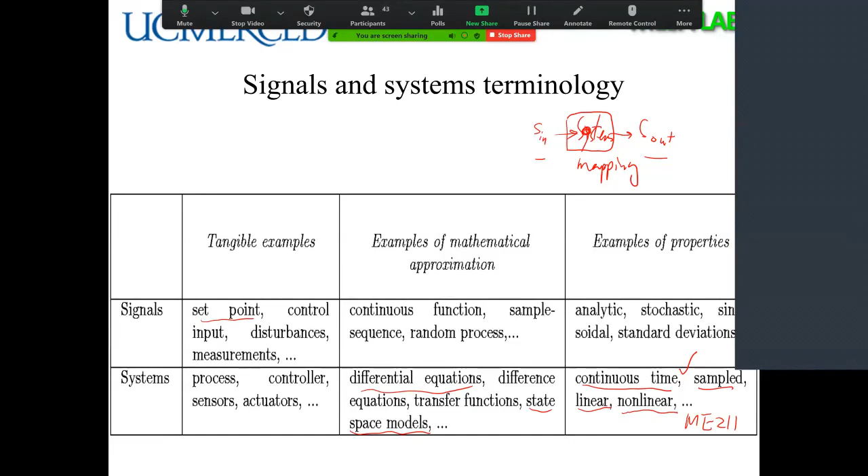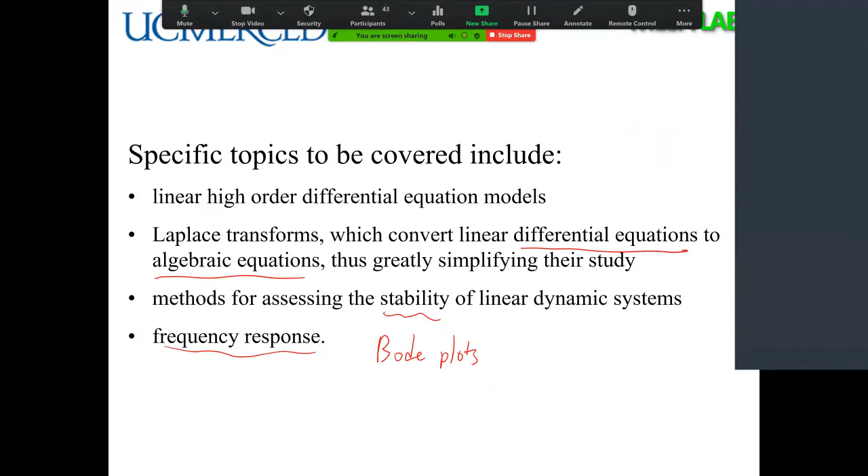For the time domain, we start with what is a signal, what is a system. A signal is a signal, a system is a system. A system is a mapping between two signals. You operate on an input signal, you produce an output signal. So, well, Laplace transform, and we are going to do a quiz today. So we're going to see. So this is our starting point.

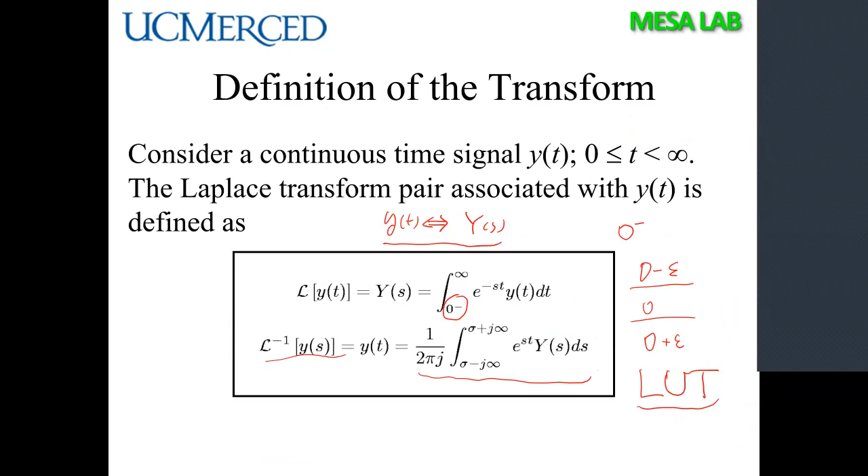We mentioned a very important name called Heaviside. He used the notation p as an operator, so we can turn a differential equation into an algebraic equation. But later on, everything is formalized in the definition of the Laplace transform. I gave an explicit warning about the 0 minus. We should not ignore that. And this is the differentiation law for the Laplace transform, so you should use the 0 minus.

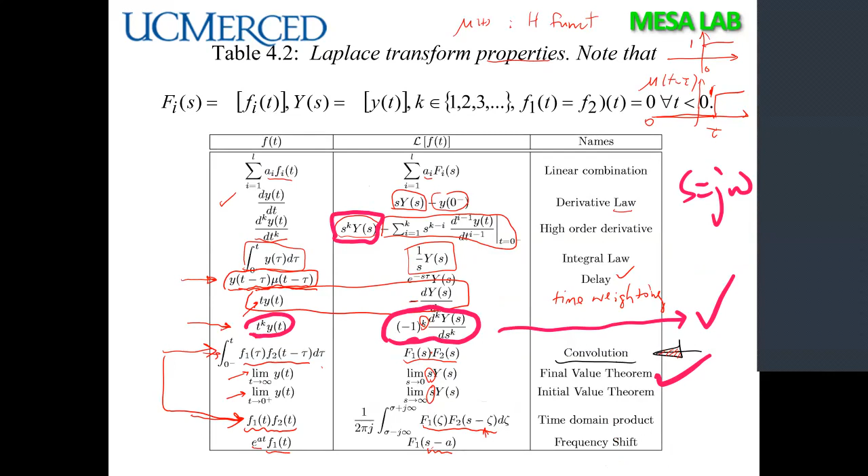Today's quiz is basically to give you training on this entry. If you don't note this entry, you will be wrong. Next lecture, I'm going to run through the quiz with you to see why you get an error, why you mess up this sign, plus versus minus. We're going to review that next week. But today we are going to continue.

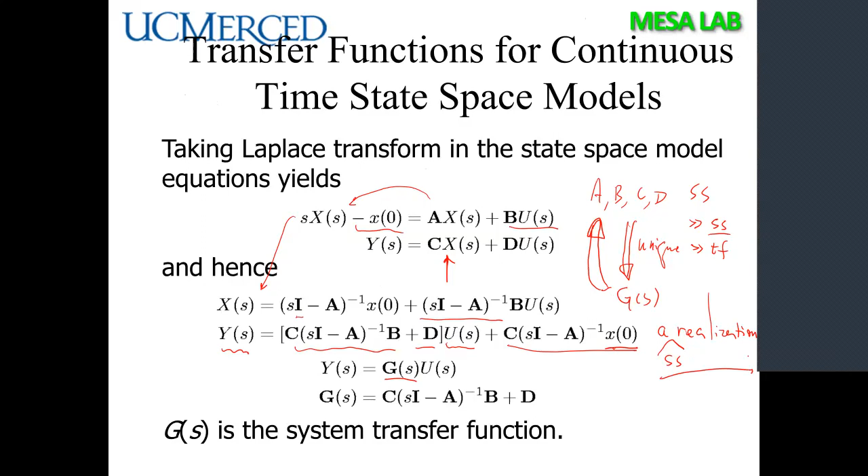We also went through the ABCD part. One thing is clear: given ABCD, the transfer function G(s) is unique. From G(s) to ABCD is not unique. Therefore, given G(s), you have infinitely many possible state space realizations. And we talked about transport delay, how in a digital computer they use a first in, last out array to represent delay.

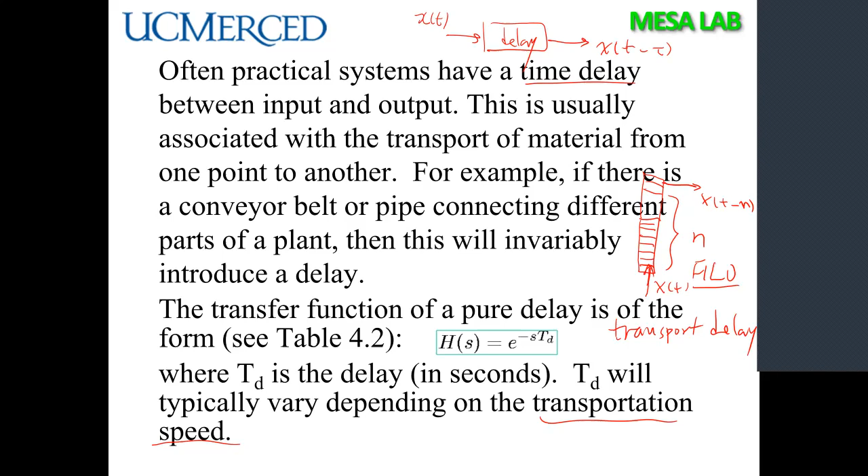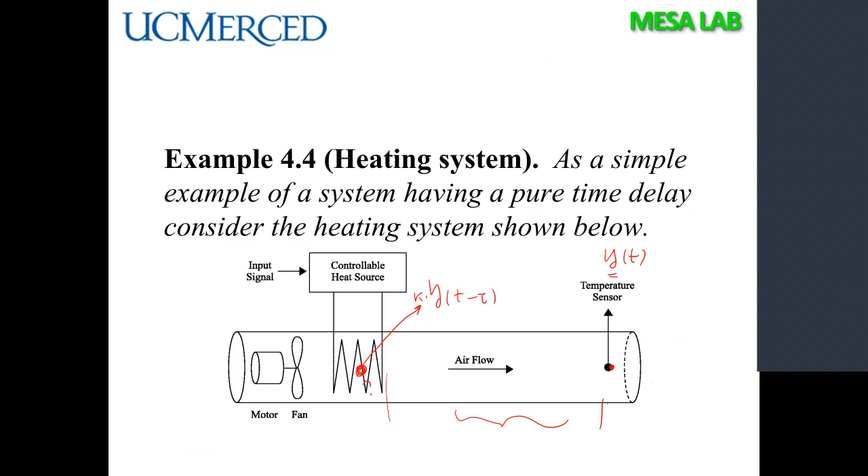Then we talked about the first order plus delay time model to mimic this type of temperature control system. Your temperature sensor and your real process may have a delay. And I mentioned that among all industrial control tasks, 80% are temperature control tasks like this. So first order plus delay is a very fundamental model, and we should pay special attention to it.

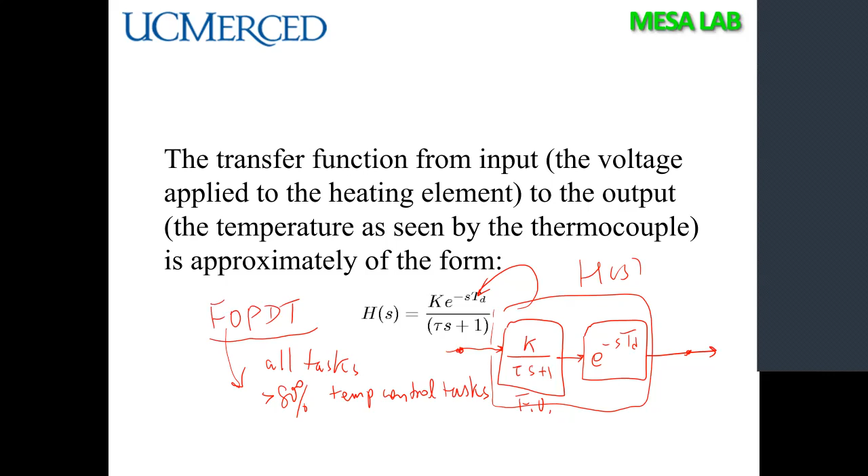So the transfer function is input and output for a linear system in algebraic form. We talked about stability, that the poles must all be in the left half plane. And we also talked about zeros in the right half plane, giving you a non-minimum phase zero.

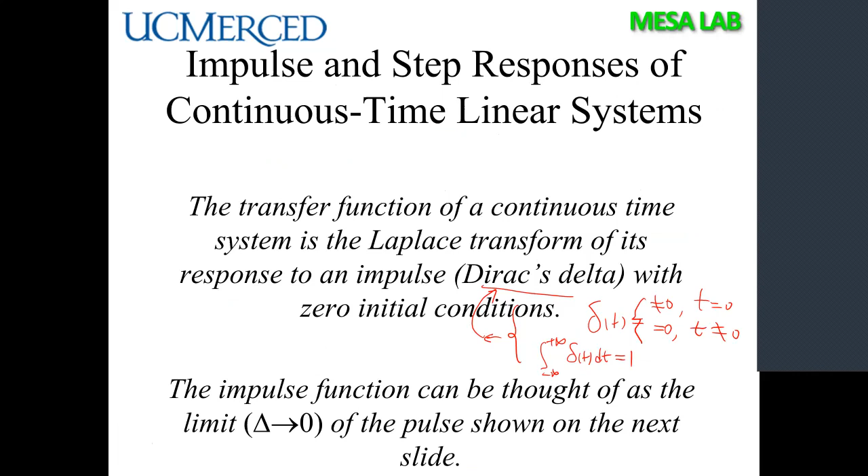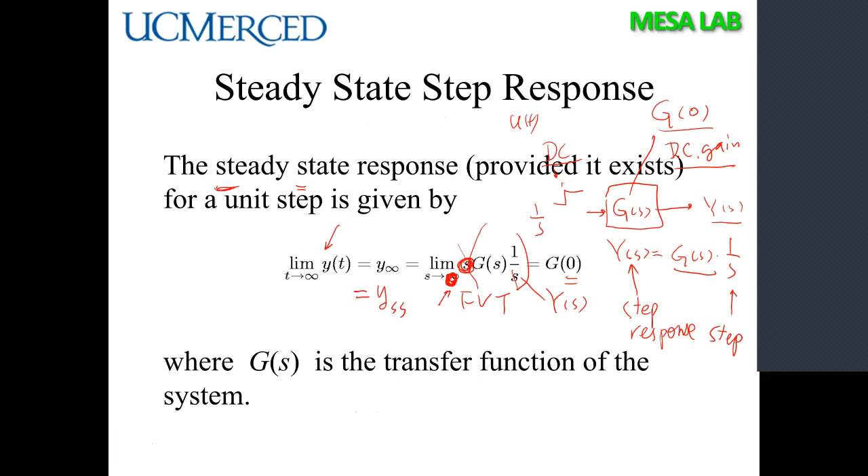Then we talked about the delta function, the unit delta. We talked about step response, steady state, and direct current gain, DC gain. In many cases, we make the DC gain 1, so with a 1 input in steady state, you also get a 1. But for the transient, you have 5 parameters: steady state, rise time, overshoot, undershoot, and settling time.

So like we showed in this figure, that undershoot part is due to the non-minimum phase phenomenon, okay? So I hope you pay attention to that. But in reality, you don't have this one. Say, for example, a first order plus delay system. You will never have this kind of undershoot there at all, okay?

So your input is always like this. So you have T, and you have an L in here. So everything is 0 until L. Then you have something going up. So this is the step response, okay? And this step response is also called the reaction curve.

So clearly, if you have a reaction curve, you should be able to infer what's this. This is a part of our homework problem. So given the measurements, like this figure, can you figure out what is my T, what is my K, what is my L? So that process is called system ID, okay? ID stands for identification, like you have driver's ID, right? You identify the system model parameters. We'll see if we get enough time to cover some of the system ID problem.

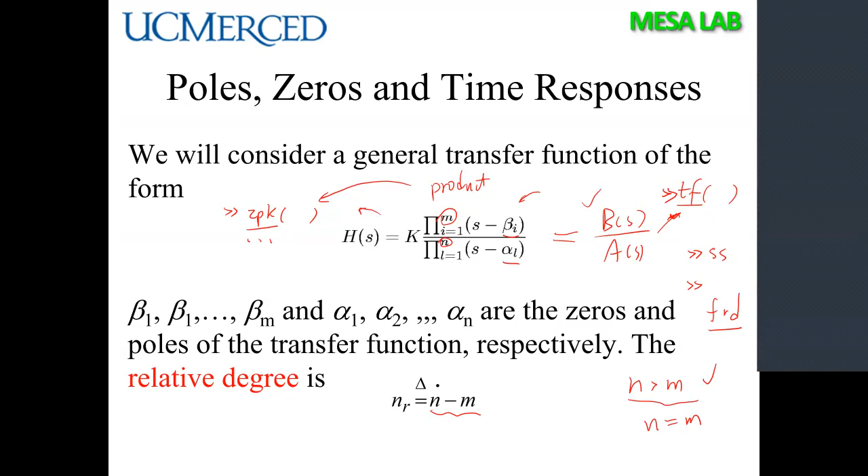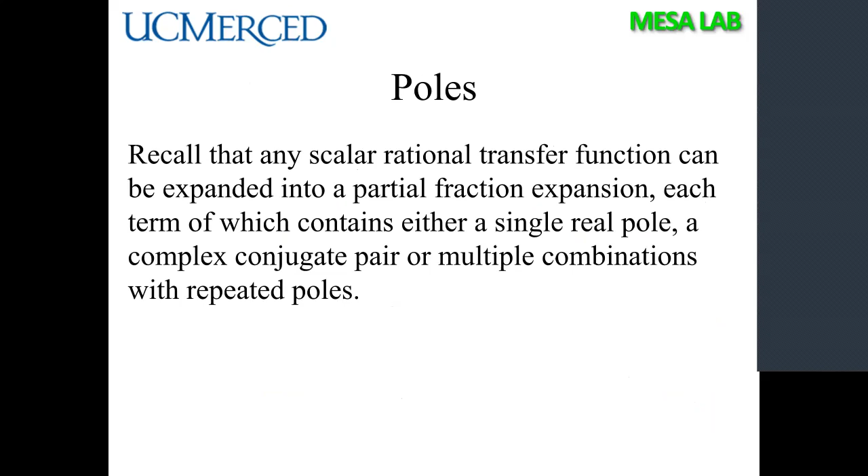So poles, you may have repeated poles, you may have complex conjugate poles, you may have distinct real poles, and so on and so forth. So in this case, we have a single pole. So I want to see what's the step response. So this is a step, this is a system. For the step response, there's a key step here. You should have learned this in high school. It's called partial fraction expansion. It turns out it's like this. So after you get these partial fractions, then you can use a lookup table. You can get this response.

So this response, in principle, I will say this is wrong. You should put the comma, t greater than or equal to 0, okay? Because if t is negative, this is not going to be right, right?

Can we get the extension on the lab? Could be. Let me check with our TAs. You mean lab 3? I think it's due next Friday, right? Not today. Or lab 2? Are you talking about lab 2? You should have enough time, like a week window to finish. So we're going to do a quiz today. So, okay.

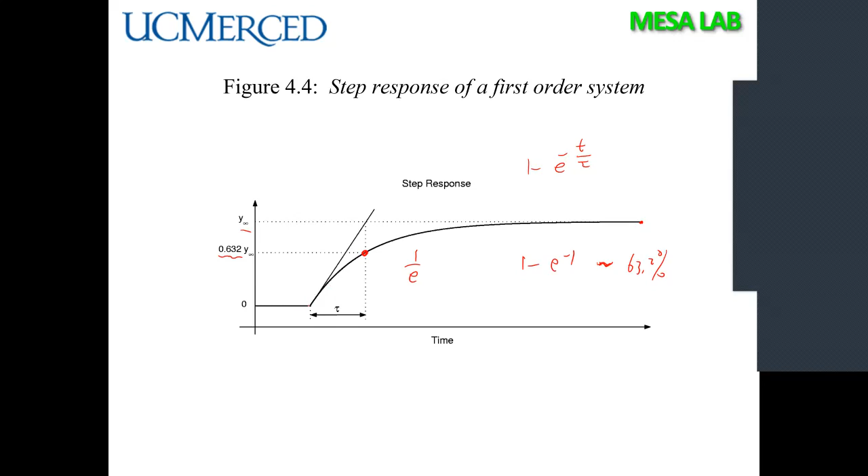So this is due to that. So then you have 1 minus e to the minus 1. So this is like 63.2%. But anyway, there's another way you can do it. You draw a tangent from the beginning, a tangent slope here. This slope hits this point, then you do this one, then you get this tau. But this is a graphical approach. Today you can use computers to fit it using least squares fitting.

So what do you mean, facts, Emmanuel? Did I miss anything?

Okay. Okay, I didn't get that. So now I get it. Okay, good. Thank you for teaching me about facts. Okay.

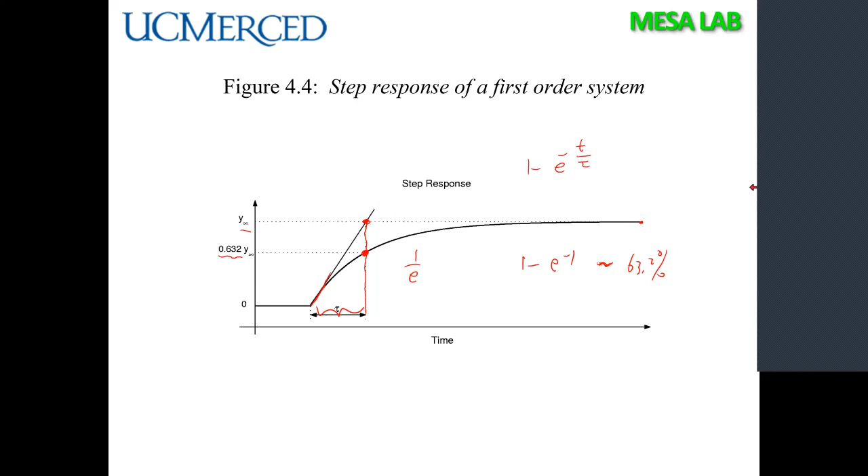So let's continue. We cannot stop at the first order system. We should also talk about second order system. With the second order system, you have three cases. Case one is like s plus a squared. Why do I keep writing this? Because we can see here H(0) is 1. Do you see H(0) is 1? And this one is also H(0) is 1, right? So the DC gain. So I write it this way. So this is case 1.

Case 2 is you have a complex number, like s plus c times s plus c complex conjugate. So you have c squared, right? So the DC gain is 1. Do you know what I'm writing? C, for example, is imaginary of c times i plus real part of c, right? Then c minus is minus imaginary of c times i plus real part of c. So this is a complex conjugate, okay? So this is one part.

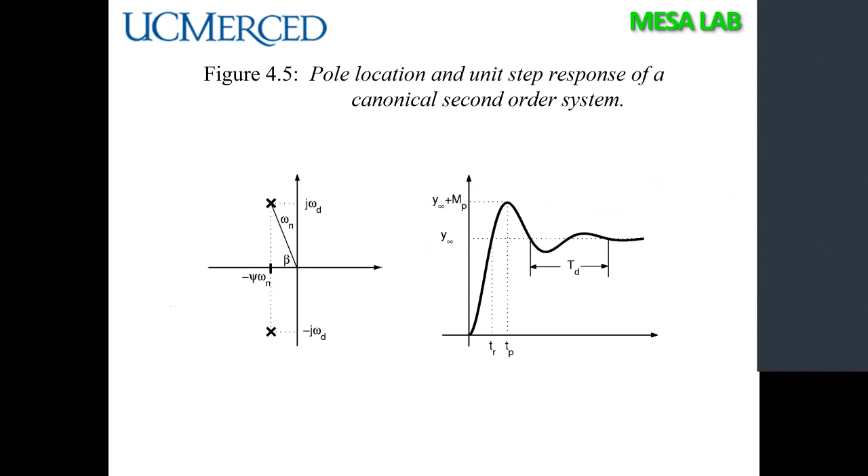So again, this DC gain is 1, it's easy to see because this ends up in here as 1. You give me a 1, I give you also 1 eventually after settling the transient. But the transient behavior is different when the C direction is different, when C is different.

So when the 0 is living on the right half plane, we call this non-minimum 0, non-minimum phase 0. Regarding why this is called non-minimum phase, we can do that in a later part, when we learn Bode plots.

So there are some important consequences of the zeros on step response. You can see when you have right half plane zeros, you have this behavior called undershoot. So there are some very interesting analytical results. Let's assume that you have a corresponding time function like this. So this is your Laplace transform.

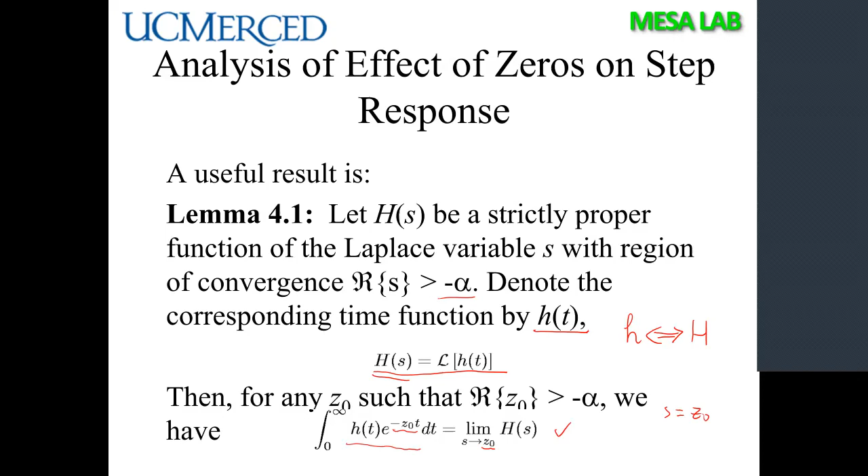So in this case, we do a Laplace transform, then we put S goes to Z0, like this one. This is the Laplace transform. If I put S in here, then it's H of S. But now S is Z0, so then it's exactly like this. According to the definition, we just send S to Z0 and we get it. So that's simple.

However, you have a linear stable system H of S. If you have a unity DC gain, what does that mean? H(0) is 1. And if we have a 0 at C, and C is on the right half plane, living on the right half plane, it's already non-minimum phase.

Then we assume that in the unit step response you have Y, with a certain settling time Ts. So we can see that Y will be in between 1 plus delta and 1 minus delta. So then you will have an undershoot for sure; it has a minimum bound. So this is the bound. It's not avoidable.

And this is linked to how big your C is, your 0 position, how far away from the imaginary axis. So that minimum bound is an indication that it's not avoidable. So if you have a non-minimum phase 0, a 0 living on the right half plane, then there is a trade-off between having a fast step response and having a small undershoot.

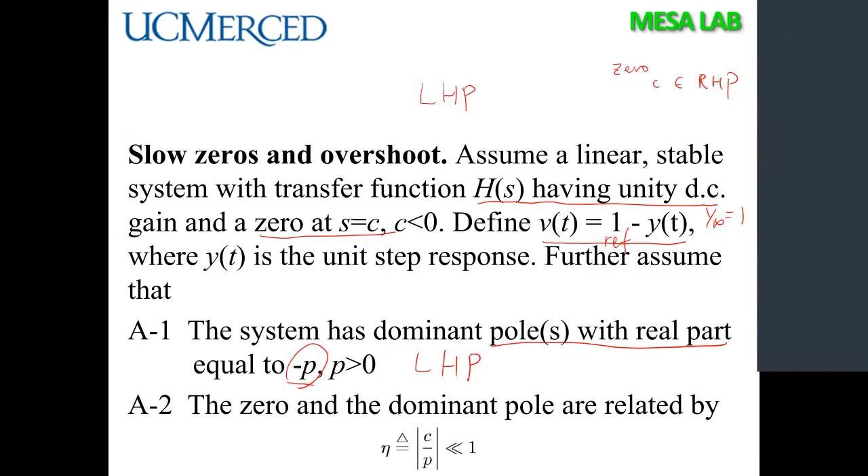So then you have the 0 and the pole related, so your 0 is smaller than the pole. In other words, if you draw this one here, the pole is here, the 0 is here. So that satisfies eta less than 1, but you should have the ratio as small as possible. So that means this is relatively closer to the imaginary axis, and this is far away from the axis.

Okay, so if this is true, then we further assume the settling time. The settling time, as I have said, you have 2% or 5%. Okay, so this is delta here.

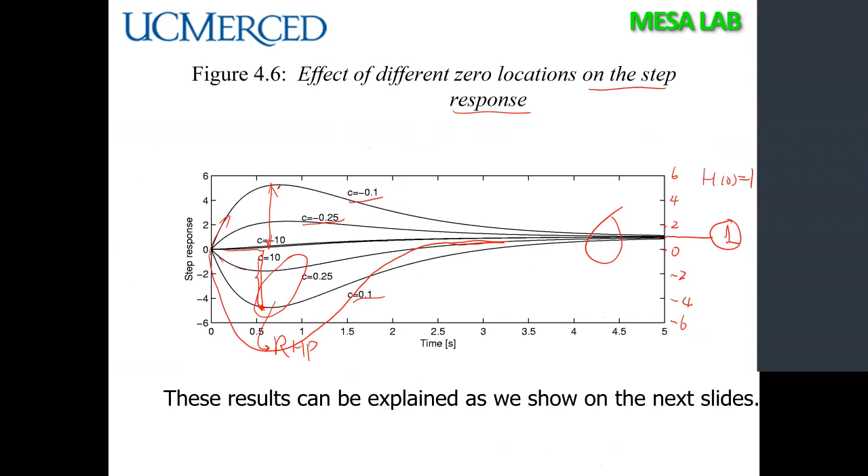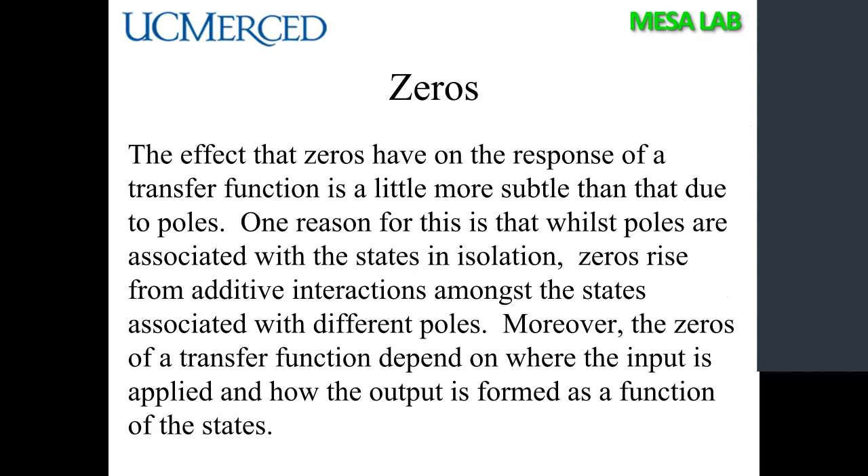So this is the delta, remember? The delta. So it could be 2% or up to 5%, okay? Doesn't matter. You can say I'm 3% away. It's okay. So that delta decides your settling time, okay? Settling time. So what I'm trying to say is the error can be upper bounded by this.

So you have something like this. So this is your response. This is your y. What is your error then? So the error is 1 minus y. So initially it's 1. This error is 1. So it becomes like this. So it goes to 0 here.

So this is t. So this is what we call the v, v of t. So the magnitude of v of t is bounded by this one; when t is 0, then this is k. So here you have k, and you have something bounded below this curve. So this is all very interesting quantitative behavior.

Okay, so that's enough for discussing the consequences of having a zero in the right half plane and left half plane. Left half plane depends on the ratio. So this ratio, this eta, needs to be observed.

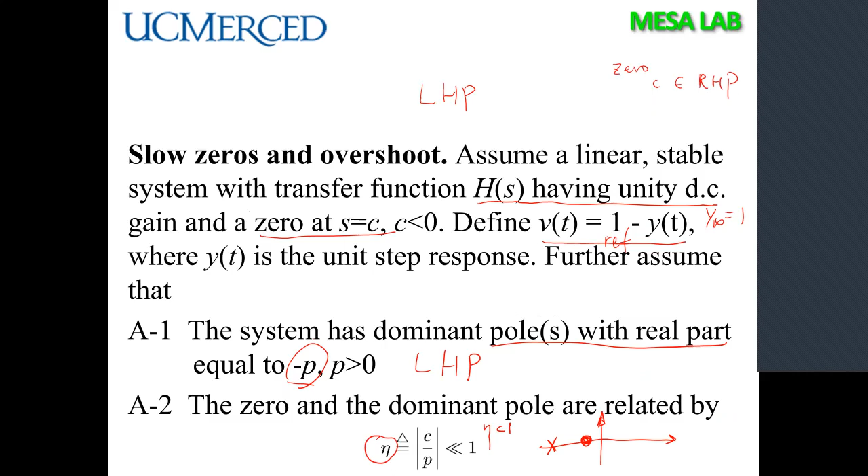So today we are going to talk about frequency response, and we are going to run through the basic ideas. But before that,

okay. So thank you. Yeah, I'm going to talk to the TA after the class. Okay.

So if we assume that we give sinusoids to the system, the system is H of s. So this H of s is actually called a linear time invariant system. So then you are going to have a sinusoid out. Sinusoid in, sinusoid out, same frequency omega, but with different amplitude and different phase. And the difference is linked to the omega.

So this is my output in time domain. It's also a sinusoid, sine omega t. So again, for frequency response, I have sine omega t injected into the system to see what's the outcome when the transients die out.

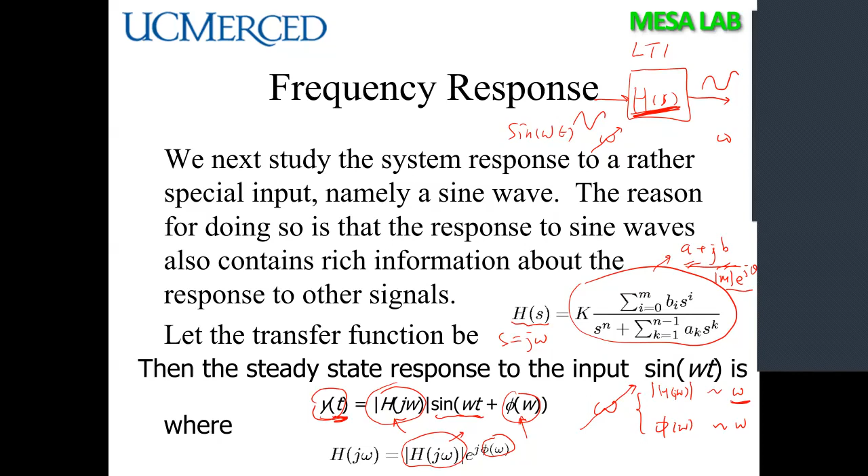All right, so summary, summary in words, okay? If I want you to write down what is the basic idea of frequency response, you should say that you have a sinusoid wave input. It forces a sinusoid wave at the output with the same frequency, okay? However, that output signal has a different amplitude.

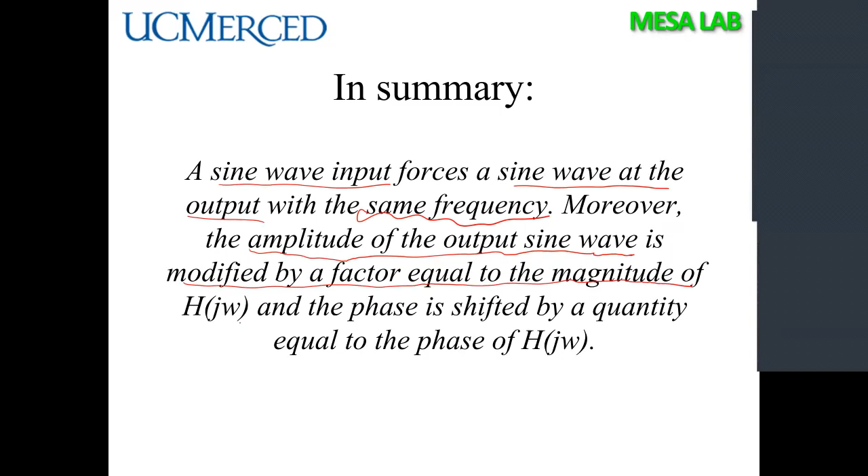The amplitude of the output sine wave is modified by a factor that is equal to the magnitude of H(jω), okay? H is my transfer function. Phase is shifted by a quantity equal to the phase of H(jω). So then you will be able to draw two plots. One is the magnitude of H(jω) versus omega, okay? And you also could plot the phase.

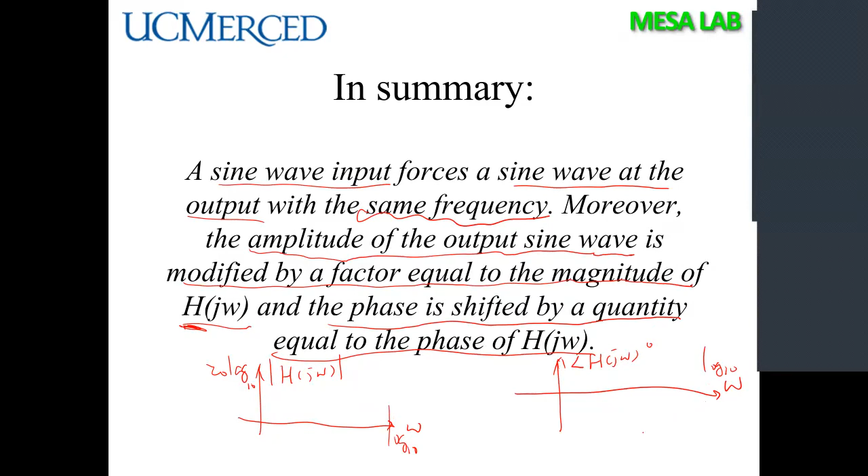So this is omega, and we usually plot phase like this, okay? Usually it is in degrees. For the magnitude, you can do 20 log10, so turn it to dB, and usually you use log10 omega on the axes. By doing that, these two plots are called Bode plots. Today, we are not going to learn how to draw Bode plots. We are going to learn next week.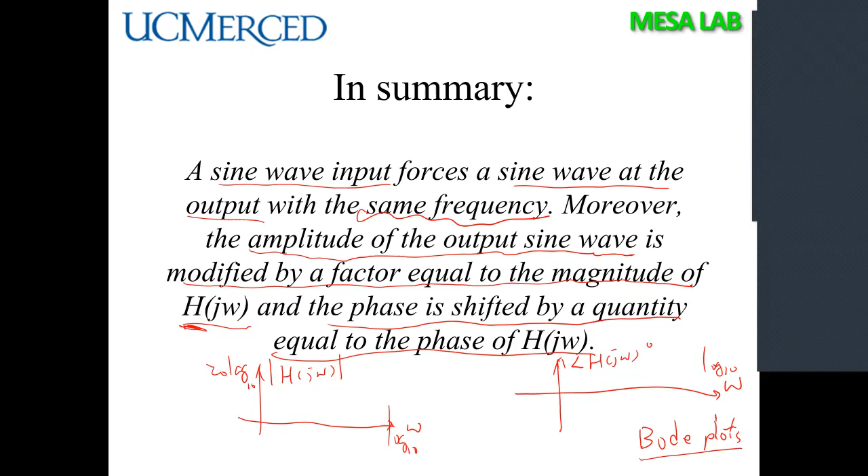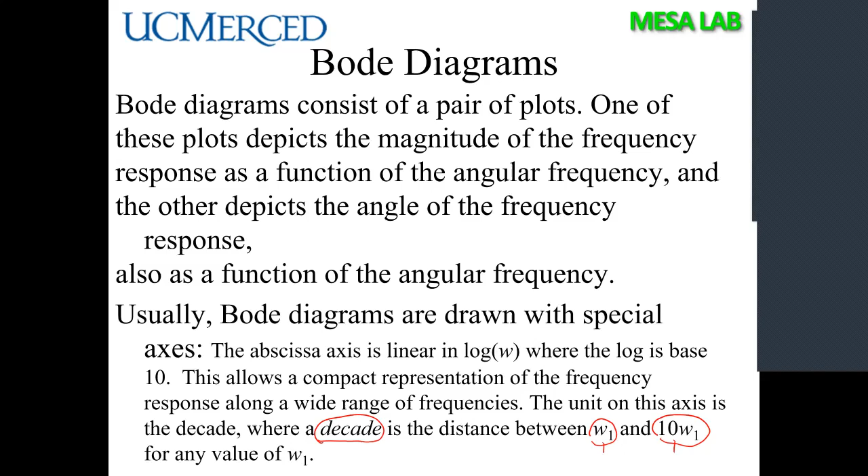But today, we are going to spend some time on the qualitative behavior, okay? You get a feeling about the system behavior in both time domain and frequency domain. The Bode diagram I already explained to you, and we are going to study how to draw it next time. But there is something called a decade. Decade means if you have omega here, then 10 times that, the distance between this one and here is called a decade. Okay, 10 times. We are going to talk about this later.

But I'm interested in learning how to do this. I give you a system, and I give you a step input, okay? What is your output here? How to solve that, okay? Do you guys have an idea? So it is not easy.

Say, for example, if I write it this way, basically I have 1/s times this thing. So then I need to write it as K1 over s, plus K2 over s plus 4, plus K3 over s plus 8, plus K4 over s plus 10. So the question is how I solve for K1, K2, K3, K4.

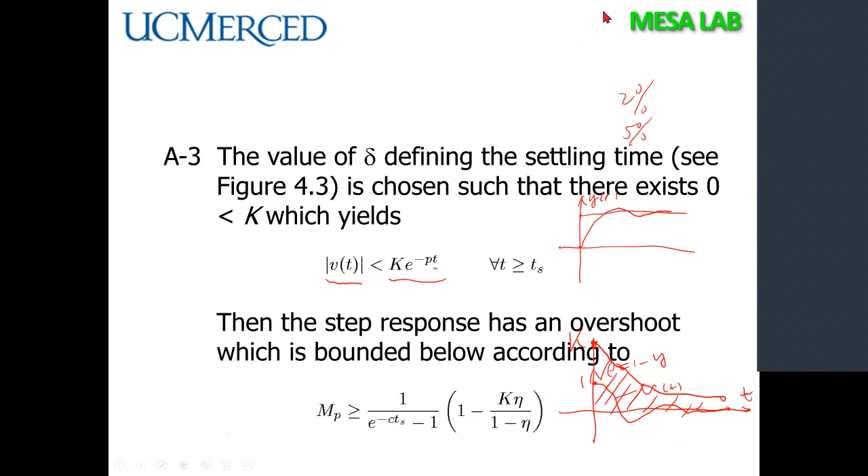But this is only valid for distinct roots. If you have like s plus 8 squared, then things will be different. But this trick is important. You can get y(t) immediately. Even if you have many roots, you can still do the same idea. So let me go back. We have seen a system here, but we didn't mention CUPI to you yet. So let's do CUPI here.

Okay, so let's do cover-up here. So what we get is K over S times (tau S plus 1). But this is better written in terms of K divided by tau, over S times (S plus 1 over tau), right? You'd better write this. So then I'm going to do cover-up. I want to write this as K1 divided by S plus K2 divided by S plus 1 over tau.

So to get K1, I cover up S, right? This is my K1. I cover up my S here, then insert S is 0. So K1 should be: copy K divided by tau here. Then you cover S and insert S equals 0. So it's 1 over tau in here. So what you get is K. So this is the guy K, right?

So how to get K2? Let's do the trick. K2 equals: cover up this S plus 1 over tau. You insert S is minus 1 over tau. So it becomes K divided by tau, copy. And I insert S is minus, so the root is minus,

wait. I touched something, I guess. No, that's all. Here.

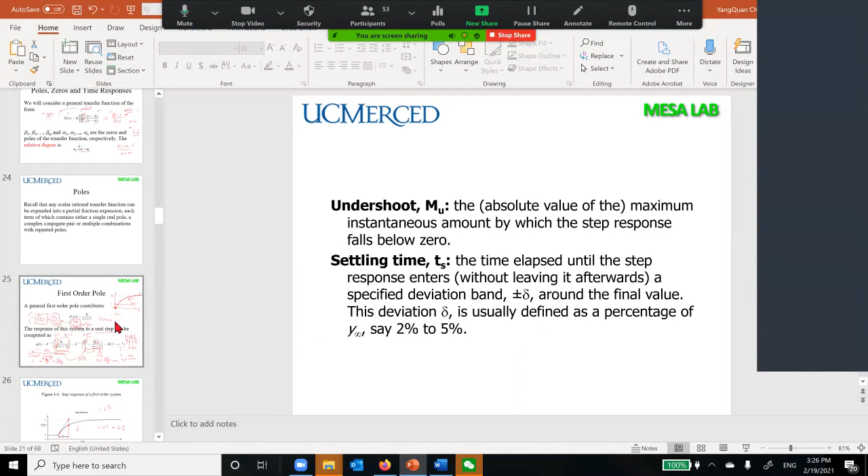Do you guys know the root is minus 1 over tau? S is minus 1 over tau. Because S is minus 1 over tau, this is minus K. Oh, wait. Oh, yeah. So it's correct. So it should be K over S minus K divided by S plus 1 over tau. Okay, so this is the second term. But if you multiply tau back again, you get a tau in here, you have 1 in here, right? So it's the same.

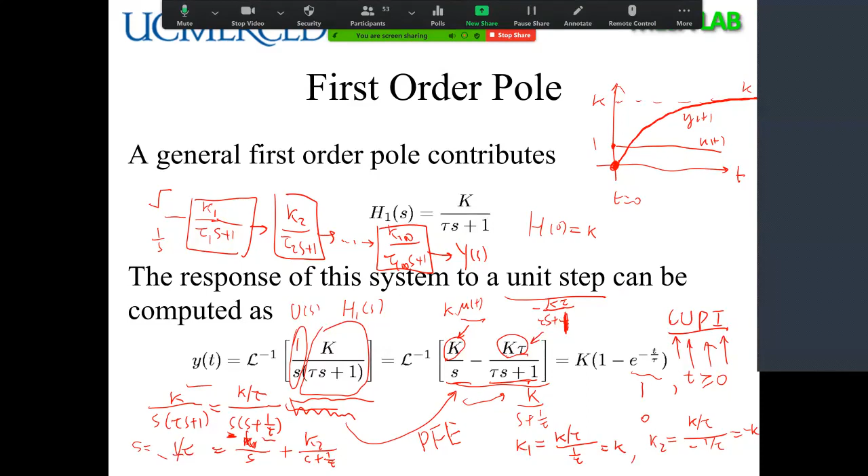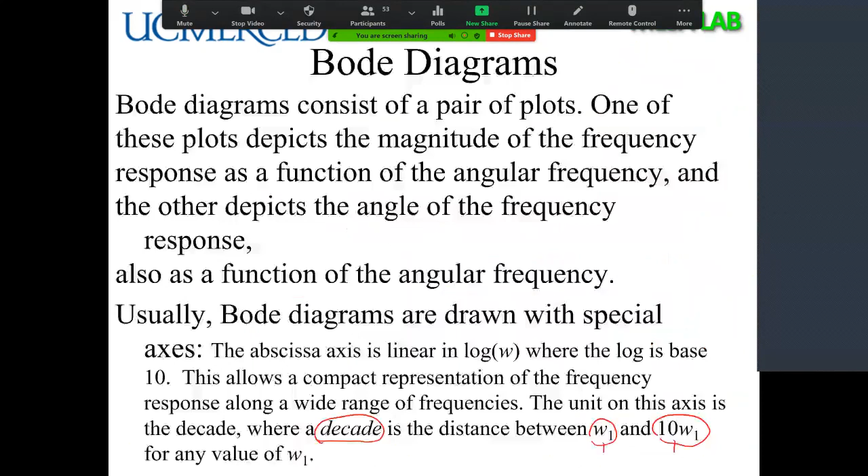Is this magic? Yeah, you should learn how to do this. So with cover-up, we can also do that. This is more systematic. So you have 2 roots, one is 0, one is minus 1 over tau, okay? So actually we can do evaluation here to see whether this y of t is the same as my step response here. Okay, so you guys can try. We should not use too much of the time here. So I'm leaving the Bode plot for the next time.

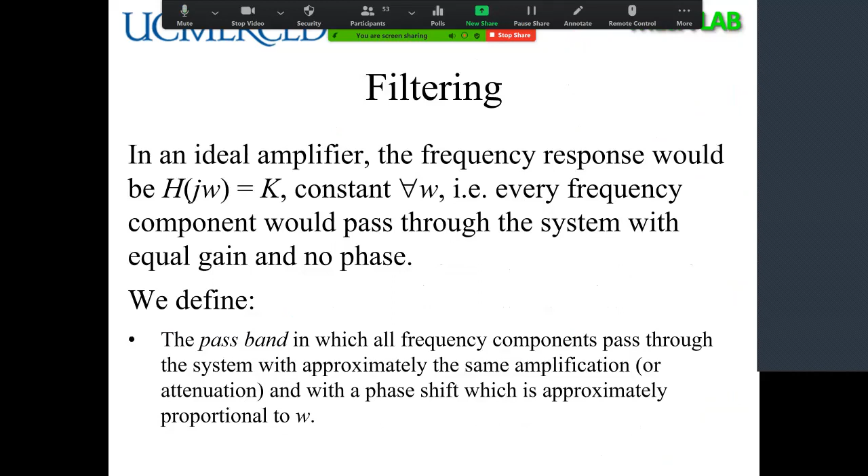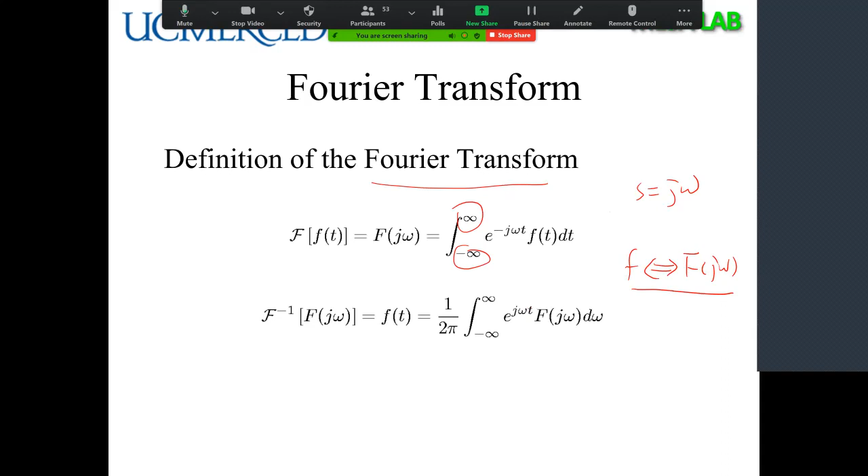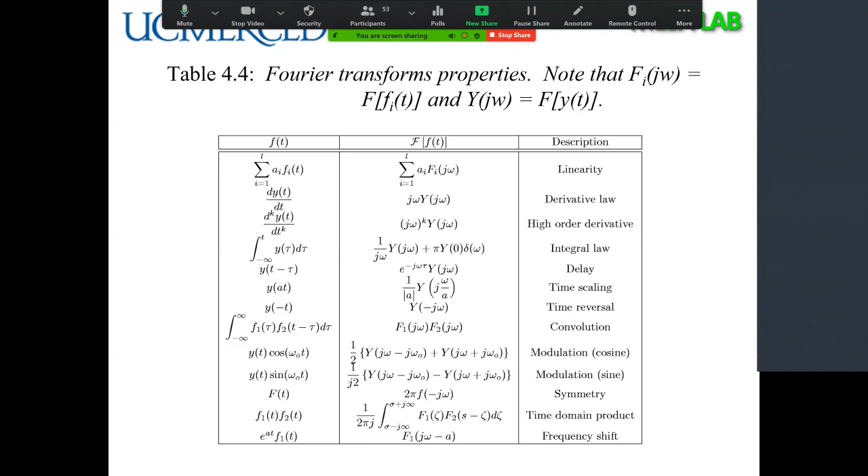Then we talked about filtering and Fourier transformation. Did you guys learn that Fourier transformation and Laplace transformation are in a similar form, in the sense that you put S as j omega in here? However, the Fourier transform is from minus infinity to infinity, okay? And this f versus F is a Fourier transformation pair, right? So then the inverse is like that. This is also mentioned in our textbook. Then you can see there's a Fourier transformation table. You also have Fourier transformation properties. I believe they are parallel to the Laplace transform.

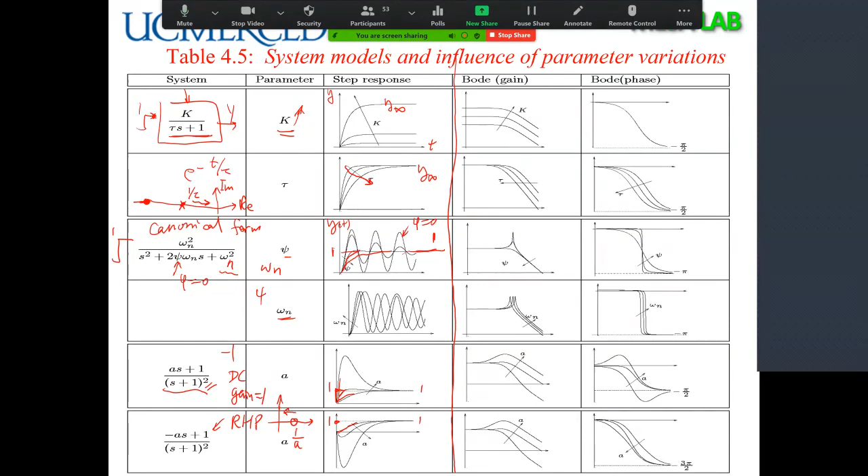But on the other hand, given a system and an input, you get the output in the Laplace transform domain. We should from now on think that there is nothing really 100% accurate in terms of a model. There's a person, you can Google him, George E. P. Box. He said the following: all models are wrong, some of them are useful. So depending on your purpose, you should not pursue a 100% accurate model because there isn't one. So be careful. From now on, we should know that the model always contains some uncertainties, okay?

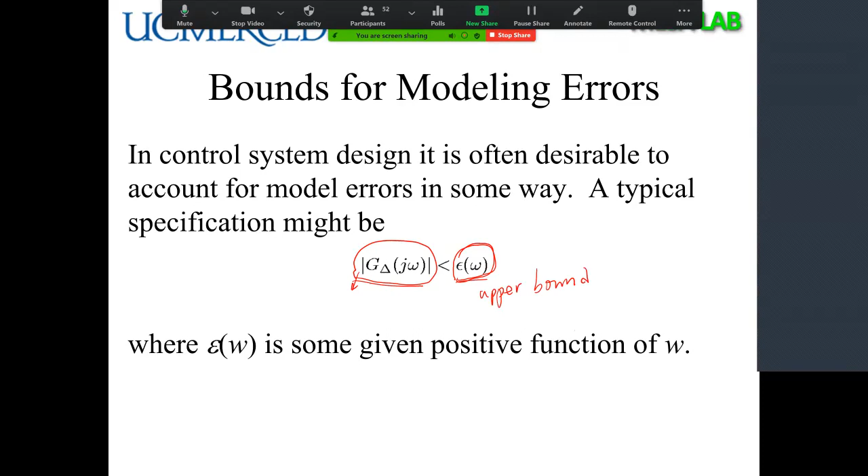And usually you don't know what your uncertainty is, but perhaps you know the bound, the upper bound. So that's how in industry people discuss this: it's uncertain, but you know it can be upper bounded. So this is also called upper bounded, by another function, which can be frequency dependent.

So the two key approaches for linear dynamic systems are time domain and frequency domain. In the frequency domain, the key part is to do a Bode plot, and next time we are going to do the Bode plot. In time domain, for step response or impulse response, I think the cover-up is the most important one. There are exceptions. Say, for example, if you have (s + p1) squared, (s + p2), (s + z1).

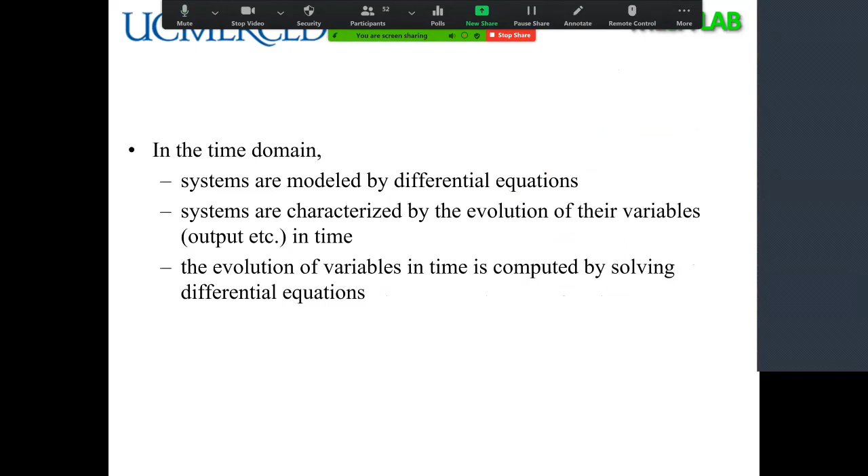So what if you have this type of thing? How do you handle this one? We have examples on that, but I don't want you to memorize this one. Still using the cover-up, but with additional rules. We'll see if I have time to cover multiplicity and more than one case, but we really need to focus on the Bode plot. In time domain and frequency domain, we're going to walk you through more next time, okay?